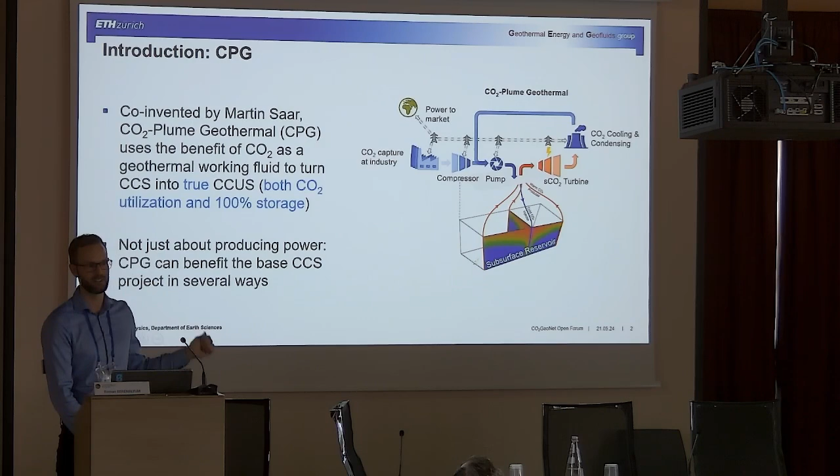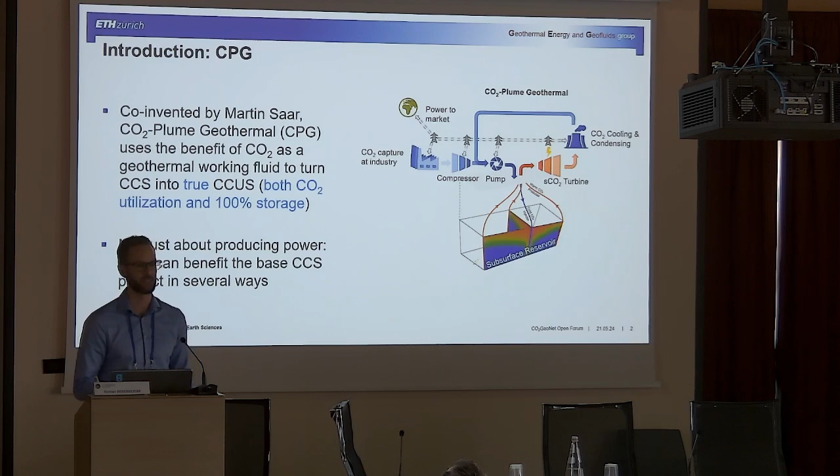Good. So I'll talk a bit about power, but I think the real message that I want to bring across today is not just about the power, but it's also about how the underlying CCS project can benefit from this technology. First, power, and let me then talk about the difference between using CO2 as opposed to water as a working fluid.

So here you can see a couple of graphs with on the y-axis the reservoir depth and on the x-axis the transmissivity of the reservoir. So that's the millidarcy meters of the reservoir. And the contour lines that you see here is how much power can be produced from a reservoir with 1 square kilometer of footprint, so a 5-spot.

And on the left-hand side, you can see the power that's produced using CO2. And if we just take 1 point as an example indicated by the yellow star, you can see that this square kilometer of surface footprint translates to roughly 3 megawatts of power for CO2. If you then move to the case where you would use the same reservoir but use water as the working fluid, you find you're roughly at half the power that you can produce.

And this ratio, so this factor 2 benefit, can be plotted. And you can see that on the right-hand side, the plot there is the benefit of CO2 over water. And you can see that that star again lies on that factor 2 improvement. So if you look carefully, you can see that actually on the right-hand side, all the way to the top right, this factor drops below 1. So there water starts becoming more beneficial.

But actually, when you think about it, how many reservoirs you know of that are very deep and at the same time have a very high permeability? There's actually not that many of them. So most of the opportunities that you're looking at will be towards the bottom left-hand corner of that plot there.

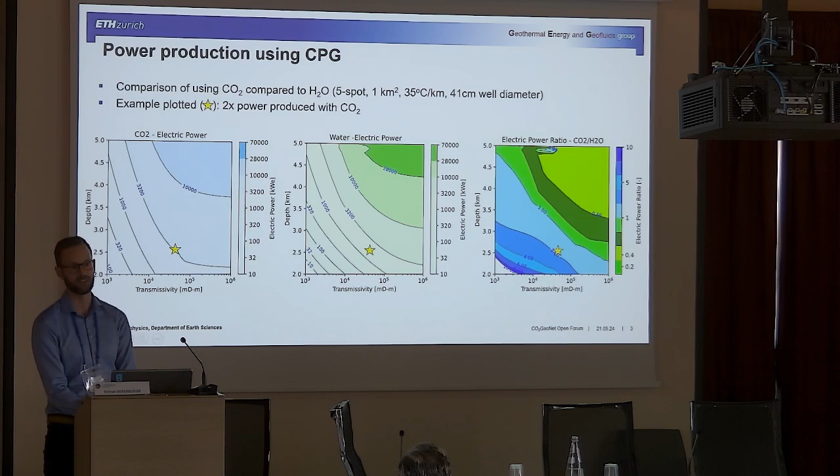So the question then is, how is that possible? How can you get more power out with CO2? Certainly you cannot beat the specific heat capacity of water. And the answer is, you're right, you can't. But there are other things you can do.

So here you see an equation for the thermal energy flux, and this will be my only equation today. But what you can see here is that indeed you take a 50% hit on the specific heat capacity. But this is more than compensated by the benefits of primarily the viscosity of the supercritical CO2. So the mass flow rates you can get through the reservoir are a lot higher than you can with just water. And that's how in the end you can get more of the energy out.

Secondly, as icing on the cake, there's also the thermosiphon effect. So there's a big density difference between the fluids that are cold on the injection side within the well and the hot CO2 coming up on the production well. And that density difference can drive the system almost by itself, and that's called the thermosiphon effect that you won't find in water-based geothermal operations.

Good. So in short, this was the power component, but let me get to the second part, which is how the underlying CCS project can benefit.

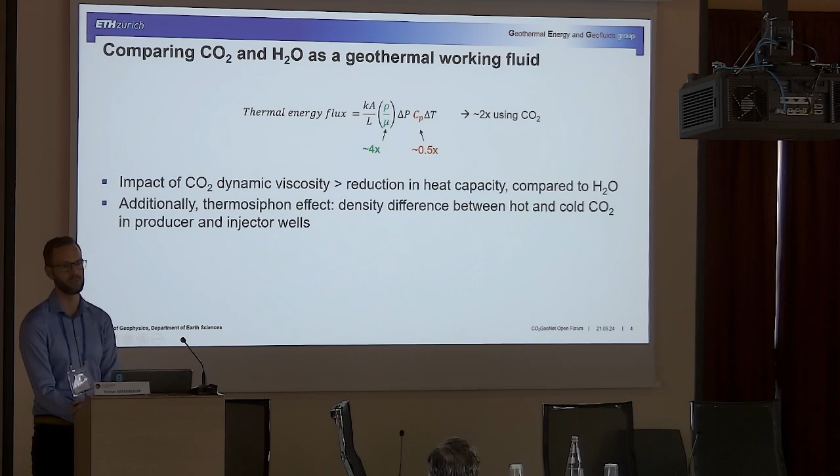So here you see a plot with, on the y-axis, the pressure of CO2 and, on the x-axis, the temperature of CO2. So it's just a PT diagram of CO2. And actually the conclusion you can draw from this is that taking the heat out at the surface, you're actually doing the subsurface a service in itself. Because by cooling the CO2, you either make it more dense, so you can increase the storage capacity of the reservoir itself, or it means that you can reduce the pressures, and the pressures are, of course, a big concern in CCS operations. So you can just plot a particular example here.

So by cooling the temperature, you can see that each degree in temperature roughly translates to 1% of improvement of your CO2 storage or your pressure. And that's just one component of how your storage capacity could increase. The other one is volumetric sweep.

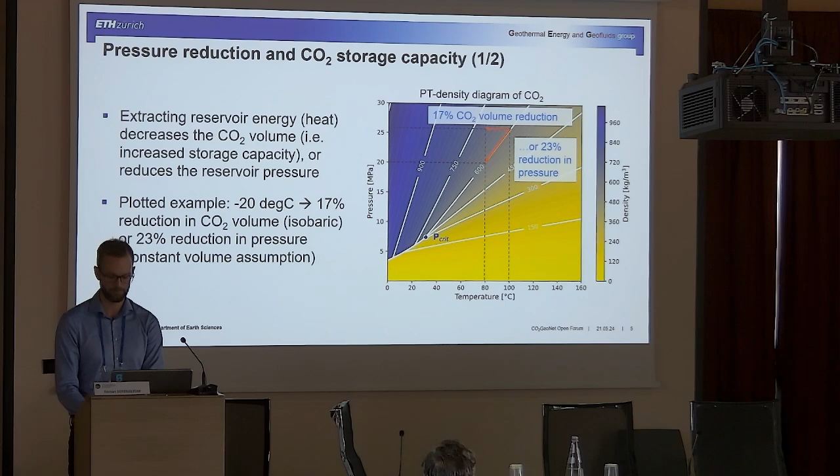So CCS projects are typically characterized by having very limited control over your CO2 plume. You inject and then physics takes care of the rest. And you won't have optimal sweep in your subsurface reservoir. So the moment that you start applying CPG, you actually have a bit more control over your local pressure gradients and where your CO2 then migrates to. And especially looking in the US, where you want to stay within your area of review, this can be quite a benefit as well. And potentially in the process also arrive at a higher volumetric sweep and therefore higher capacity.

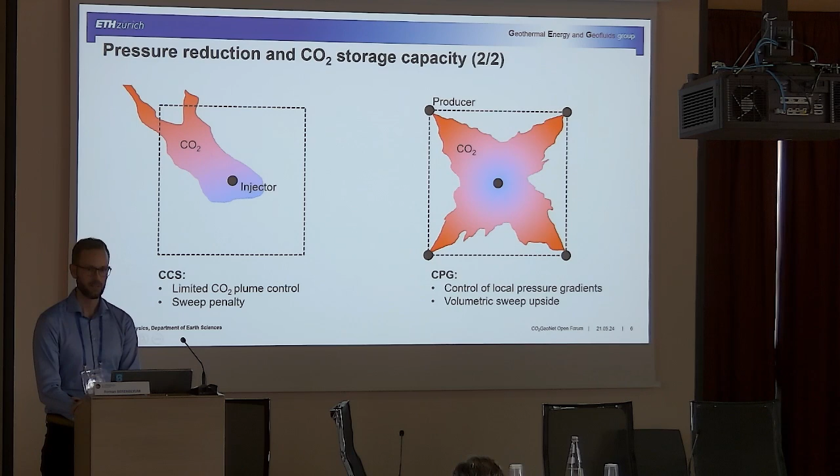Moving on to the economics. First of all, CapEx. CCS projects really need to inject everything that they have in their agreements. So typically you'll find a lot of redundancy built in to the injection capacity. And it's a real benefit if you have the optionality to flexibly change your producers to injectors. So if you find some surprises, which you often do, then having these additional producers can help to sustain the plateau.

And additionally, towards the end of economic life of your geothermal operation, so say after 30, 40 years when your cold front finally does arrive at your producer wells, you can then convert these producer wells back into injectors. And by then, pressure might be a bit higher in your storage reservoir, and having this additional injection capacity can help to sustain the capacity for a few more years. And in the end, you're being paid for the capacity, not for declining injection at your site. So this is how CPG can help with that.

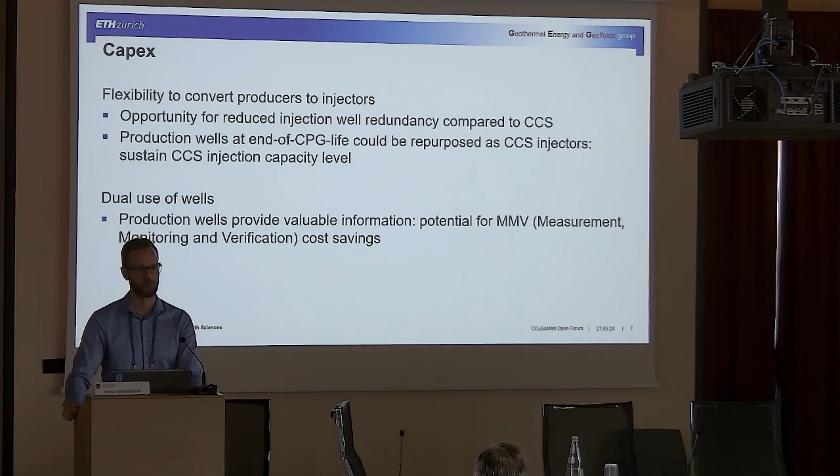Finally, there's a lot of information that can be gathered from the producer wells. So there's a lot of MMV that comes almost for free with the CPG operations. Operations. So in Aquistore, there was a big issue with intermittent injection of CO2, specifically the halite scaling that could occur there. Now, again, you have more optionality in CPG because you have two CO2 streams. You have the CO2 stream coming from your capture plant. But if your capture plant is down, you still have a CO2 stream coming from the producer wells. So that maintains the uptime of your injectors and potentially can help with mitigating some of these concerns with intermittent CO2 injection.

Finally, but not lastly, there's also the component of public acceptance. So this is CO2 disposal with benefits and can really help to bring in the local communities to show that CO2 is not just waste disposal, it's really more than that. And a topic that I think is not getting enough attention is the CO2 intensity of CCS projects themselves. So being able to leverage the CO2 to locally produce clean power to power the operations can also help in that respect to get the public acceptance.

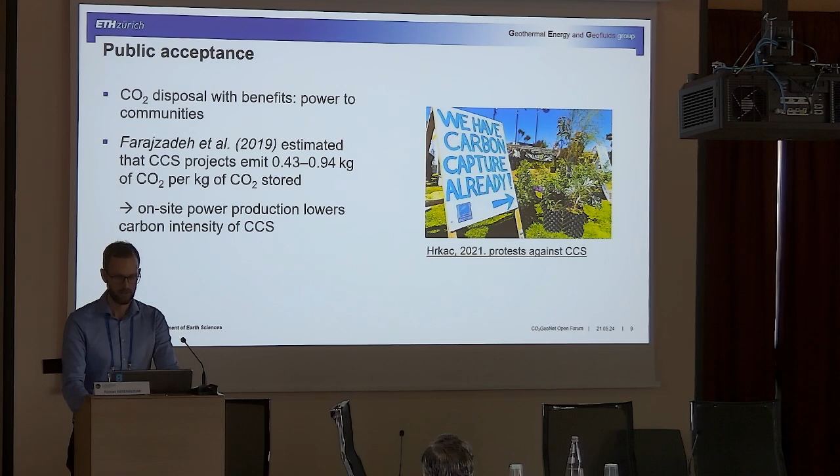Good. Then moving on to some of the challenges. So what we still need for large-scale adoption of this technology is more work on the development of lower temperature CO2 turbines. There's quite a lot of work ongoing on higher temperature turbines, but we need a lower temperature range. Also, on the cooling and condensing side, high pressure cooling and condensing with CO2. Equally, on the production side, there's work needed on the treatment of the production stream, for instance, to take out the water. And there's actually quite a number of groups working on treatment facilities for that.

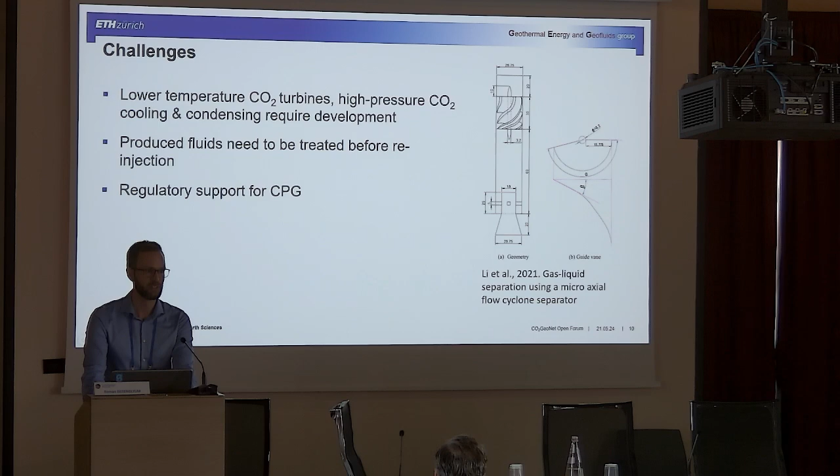Equally, as is always the case, technology is moving faster than regulation. So we need the regulatory support to make this technology able to fly, because we need to be treated just like any CCS project. Because in the end, we still store the CO2 just like the underlying CCS project does. So we're working actively on these challenges. For that, we've set up a CPG consortium last year together with Shell, Petrobras, Holcim, Ad Terra Energy, of course the ETH, and several academic partners that are also in the room today.

And the objective of this consortium is to demonstrate the potential and technical feasibility of CPG to enable FIDs on commercial scale projects. And so we're currently working towards a first field demonstration in phase 2 of the consortium, which is starting next year. So here's also the website. It also includes links to the over 16 peer-reviewed publications that we've published to date.

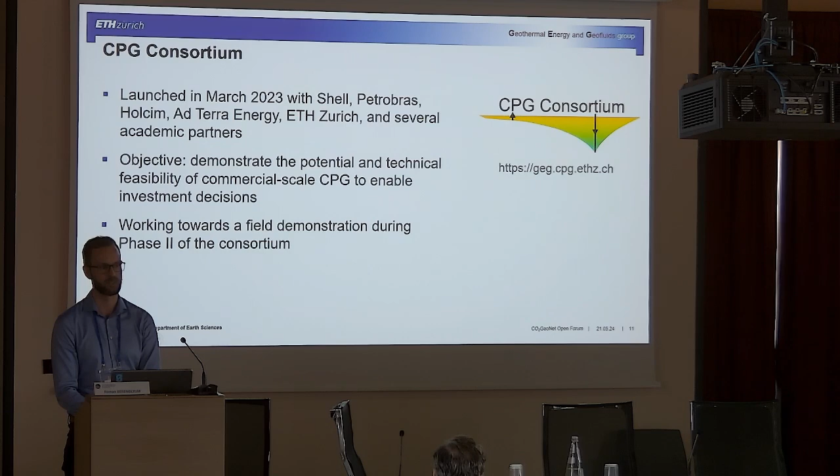So to wrap up, CPG is an emerging technology that has the potential not just to produce power, but also to benefit the underlying CCS projects. And I'm very keen to learn more about overlaps you see with your area of research or your ongoing projects.